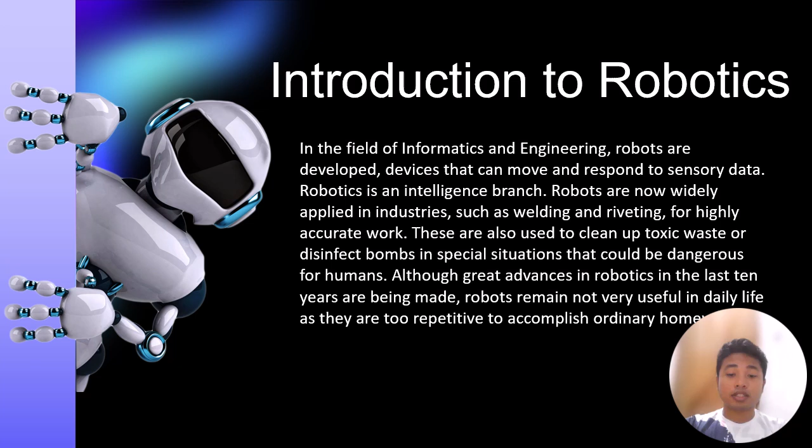So what are the building blocks of robotics? We have the mechanical system, the power supply, the sensors, the signal processing system, and the control system.

What is this mechanical system? This is the most basic part of a robot, which comprises chassis, wheel, and placement. We also need a device in the robot which converts electrical energy to mechanical energy. These are called actuators. The most popular actuator is a DC motor.

What about power supply? A power supply is generally used in robots. An example of that is a battery DC.

Sensors. So what is a sensor? A robot generally consists of various sensors. These sensors help robots take input and perform an action accordingly. Later on, I will discuss what sensors and actuators are.

Signal processing: the signal processing system consists of various components. And lastly, the control system. Robotics control systems may have a lot of varieties.

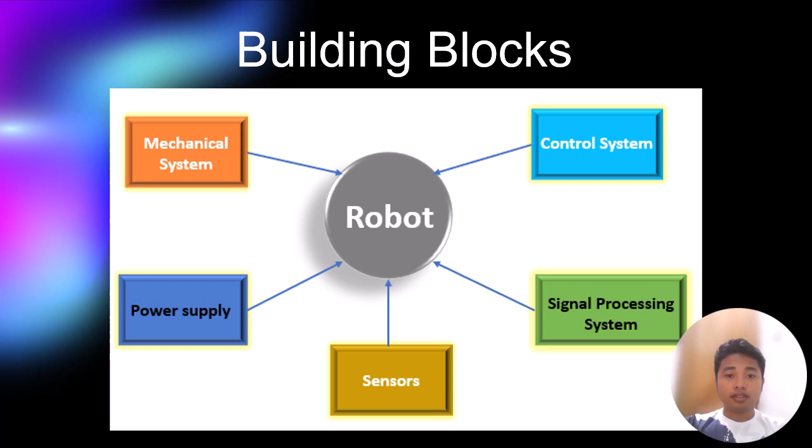Now, what are the classifications of robots, or what are the types of robots? We have manual handling device, fixed sequence robot, variable sequence robot, playback robot, numerical control robot, and intelligence robot.

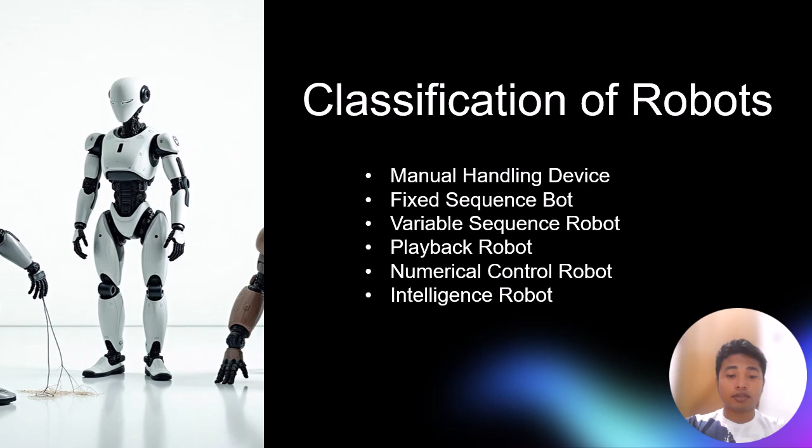So what is this manual handling device? This kind of robot gets operated by an operator, though this kind of robot has some degree of freedom. An example of this is the UR5E.

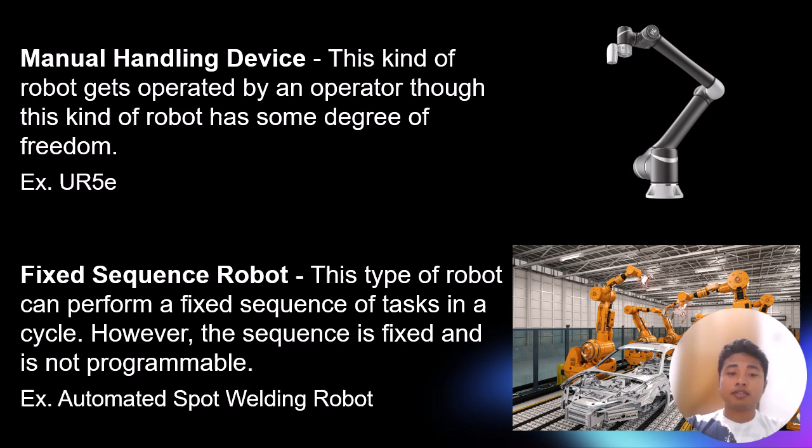What is this variable sequence robot? This type of robot is almost the same as fixed sequence robots, except that these robots are reprogrammable. The example of this is the CNC, or Computer Numerical Control Robot, for drilling or milling.

So why is it called variable sequence? It can be modified by simply updating the program. It can be adapted for different parts or product batches without needing hardware changes. Programs can be stored and recalled for future jobs, increasing flexibility.

And now, the playback robot.

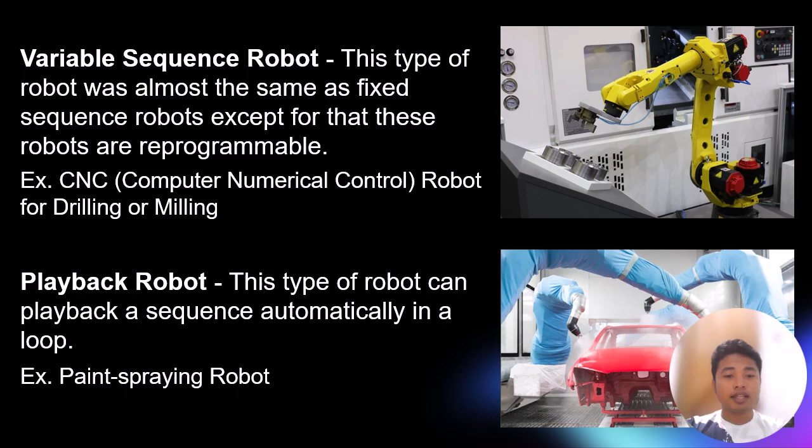This type of robot can play back a sequence automatically in a loop. An example is a paint spraying robot. A technician guides the robot arm through the painting process manually, and the robot records joint positions, speeds, and timing. The robot then plays back the same motion again and again, executing the sequence autonomously for production.

Another one is the numerical control robot. This kind of robot also works through a sequence of instructions, however the instruction set is numerical. The best example for this is the CNC milling machine. Why is it considered numerical control? Its movement is dictated by numerical data, like G-code. It executes precise and repeatable paths to perform tasks like cutting, drilling, sharpening, or shaping materials, typically using pre-programmed instructions rather than learning by demonstration.

Another one is the intelligent robot. Robots that can sense the environment around them using sensors and take a necessary set of actions automatically are generally categorized as intelligent robots. What's the best example of this? The best example is the autonomous mobile robot used by big companies like Amazon to deliver products automatically by transporting them.

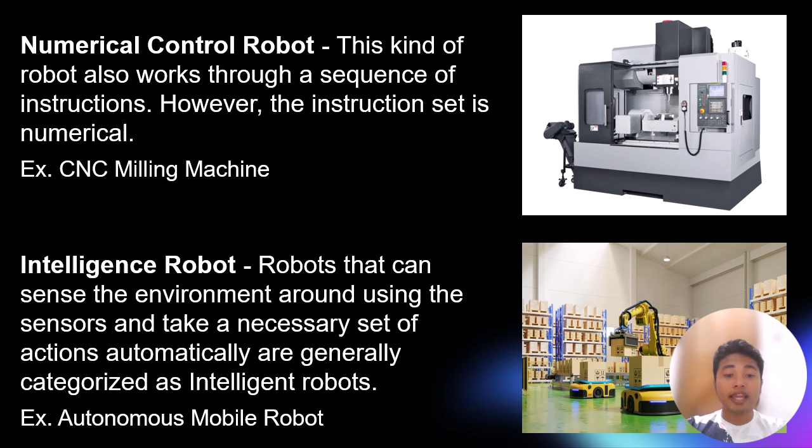Why is it called intelligent? It's called intelligent because it uses sensors like LIDAR, cameras, or ultrasound to detect obstacles it might encounter. It also makes real-time decisions to navigate around objects and optimize routes, and communicates with other robots and systems. It often incorporates machine learning or AI algorithms to improve performance.

So here we are, sensors and actuators. Sensors are the senses of robots, allowing them to perceive their environment. They can detect light, sound, temperature, and more. Actuators are the muscles that move the robots based on sensor input, converting energy into motion, enabling robots to perform complex tasks.

What are the examples of sensors? We have camera, which detects images or video and can be used for object detection and navigation. Another one is proximity, for the distance to nearby objects, used to avoid obstacles. Another one is infrared, used for line following in toy robots. Touch or tactile sensors are for gripping objects safely. Gyroscope is for balancing, as in drones. Temperature sensors are for monitoring overheating. Another one is microphone, for environmental noise.

What are the examples of actuators? Electric motors are used for moving arms, wheels, and fans. The servo motor is for robotic arms and grippers. Hydraulic cylinders are for heavy lifting robots. Pneumatic actuators are for fast repetitive motions, an example being stamping. Speakers are for talking or alerting.

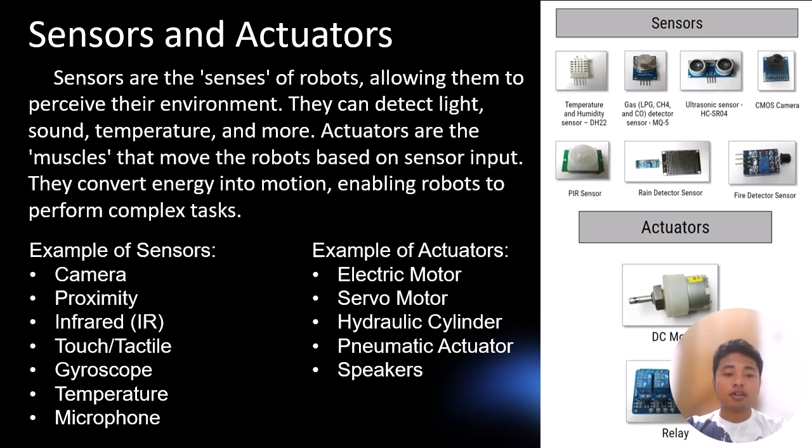Now, programming in robotics. Programming is essential for robots to function. It involves writing codes that tell the robot how to process information and perform tasks. Programming languages used in robots include Python, C++, and MATLAB. Robotics programming can incorporate artificial intelligence to enhance decision making.

Robotics programming involves motion control, to move arms, wheels, or joints precisely. An example is making a robot arm pick an object. Another one is sensor integration, for reading data from sensors like cameras, proximity detectors, or gyroscopes, for example using an ultrasonic sensor to avoid obstacles.

Another one is decision making, which is like logic: writing conditions and control structures, if-else statements, and loops. For example, if the sensor detects a wall, then it turns left or right. Another one is communication, which sends or receives data from other systems or robots, for example coordinating two robots on an assembly line.

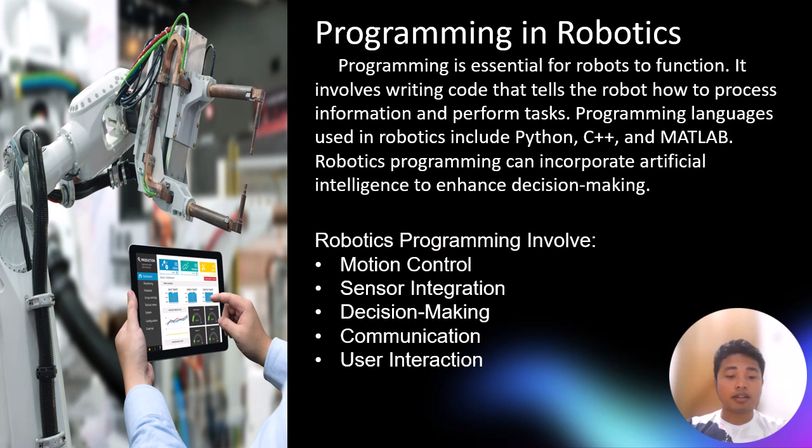Lastly is user interaction, using interfaces or voice commands to control the robot. It's like Siri, but Siri is a system, not actually a robot. So that's all, thank you, and I hope you understand something.